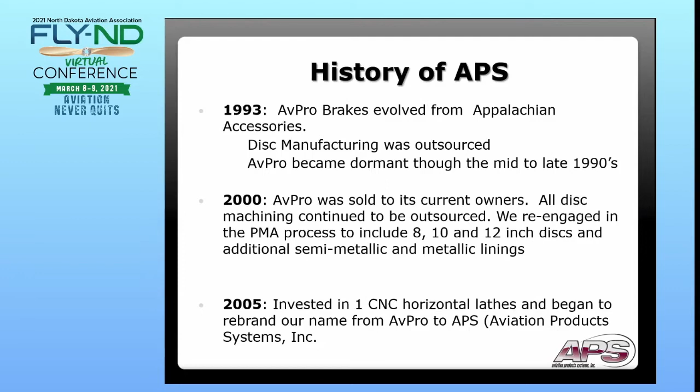So we expanded into the 8, 10, and 12 inch discs, and then added some more semi-metallic and metallic linings. About 2005, we invested in a machining company, and we brought all machining in-house, where we started with one CNC horizontal lathe. At that point, we changed the name from AvPro to APS, which stands for Aviation Products Systems.

In 2009, we added another lathe, and in '16 the same thing. Now I believe we have 5 horizontal lathes that are running 10 hours per day, 2 different shifts, 5 days a week.

With that, we have been able to cover all the aircraft that use this style of brakes, and the demand is growing out there with everything that's going on in the industry.

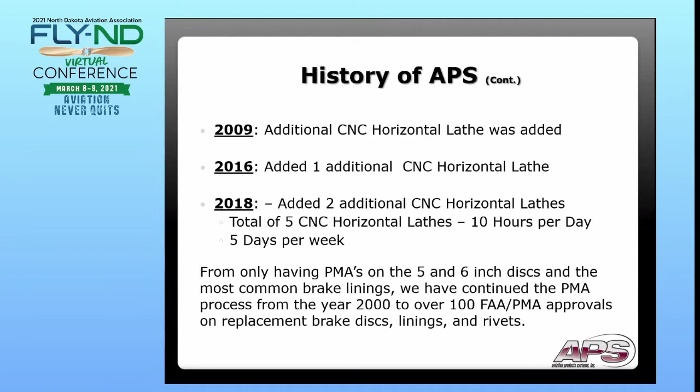With the PMA process, the parts manufacturer approval process, under Title 14 CFR Part 21 Subpart K, that's what lists all of our regulations that we must follow, and the procedures thereof to get the approval to do what we have to do to make our products.

The FAA spells out that the PMA part has to be an approved identical part, which is a direct replacement for that of the OEM, on the linings and the disc both. It must be equal to or better than that of the OEM. So Cleveland, the OEM in my case, is the baseline. I had to meet or beat that of Cleveland on a comparison test basis to be able to move forward with the products.

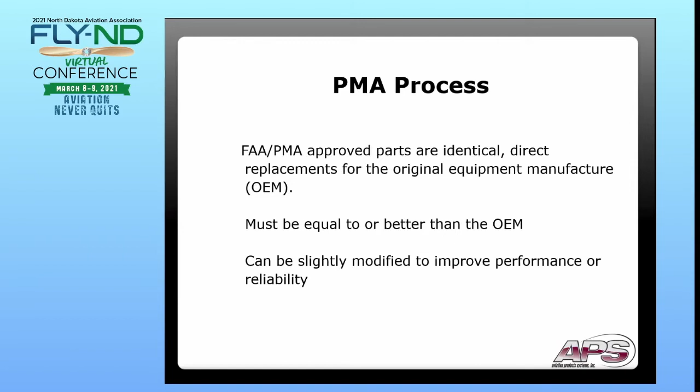That said, it can slightly be modified to improve the performance or reliability thereof. What we've done, as you can tell, is our brake discs are black. That black color is not a coating - it is an actual byproduct of the heat treatment we put our discs through, which we'll get into here in a little bit.

With the PMA process, when we started off after we purchased this company, the PMA process starts where you have to identify a part that you want to PMA. For this case, it was the 8, 10, and 12-inch disc.

So we had to reverse engineer each part of Cleveland's to be able to apply for the design approval on the drawings, the material specs, everything listed there, in a big packet to send off to the FAA to be able to proceed with the testing to show that our product was equal to or better than that of Cleveland.

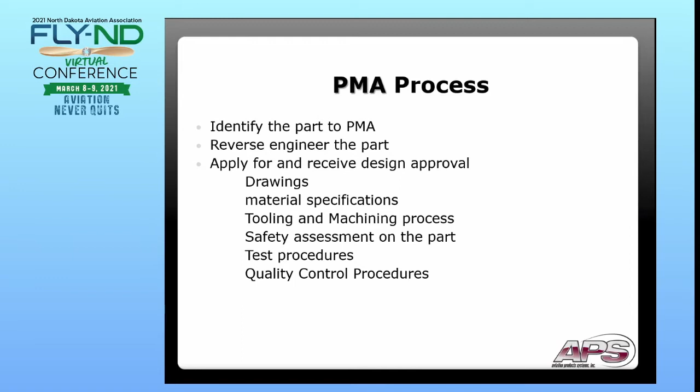At this point, we sent that packet off with all the drawings, all the part numbers, and all the measurements, everything. And what we had to do next was testing.

After we got approval on that packet we sent to the FAA, we had to test it. We had to test our product against Cleveland's product. And the test bed that we had to use was very, very extreme.

We took a Cheyenne 4 at 10,330 pound landing weight, 90 knot landing speed, no flaps, no reverse thrust, and we had to decelerate at a rate of 10 feet per second squared. As you can see, it created 1.7 million and some change foot-pounds of kinetic energy to stop that brake. This was all on a machine.

The 10 feet per second squared equates to that aircraft at that weight stopping in approximately 12 seconds and in 240 meters on average.

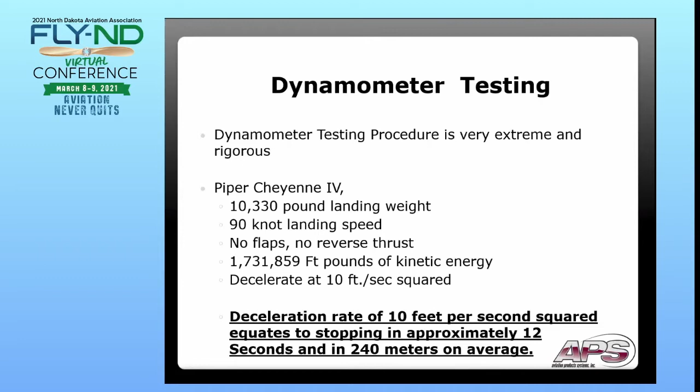So what it's doing now is accelerating to the 90 knot landing speed, no flaps, no reverse thrust, and it's programmed to decelerate at that 10 feet per second squared.

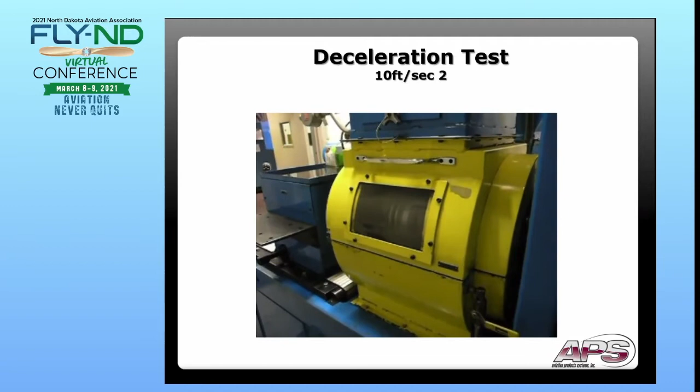So that was one stop. We had to do that to failure on Cleveland to get our baseline. Our baseline on that was 32 stops until Cleveland's part failed. Failure was separation of the friction part of the disc from the hat part of the disc.

These are both our linings and Cleveland's linings and disc. Theirs failed at 32 stops. What we did was we stopped at 34, where ours was still together. We could have done maybe 35, and could have failed on 35, but we stopped at 34 because we were equal to or better than that of Cleveland's.

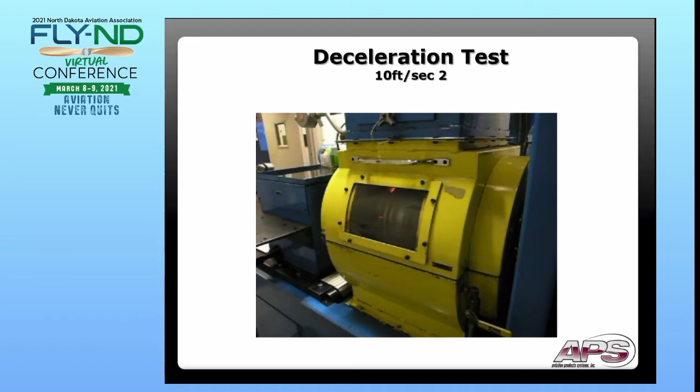At that point we have our first article. We know it works on a machine just fine. But we had to take that and put our lining in our disc after we were equal to or better than Cleveland's, and in this case it was better than.

Now, since it was a Cheyenne 4, that was the bigger 12-inch disc. Since we did not have the 8 and 10-inch disc on the PMA side, and since all of our submitted data for the drawing approvals was made to the same specific drawings, they grandfathered everything in below it, the 10 and 8-inch disc. So we did not have to do a flight test or a dyno test on every brake disc, just on that Cheyenne 4.

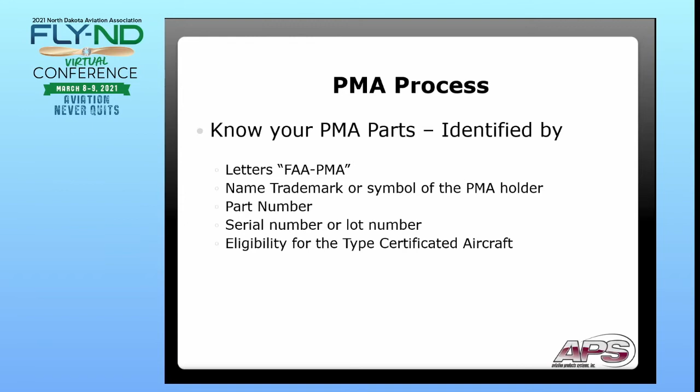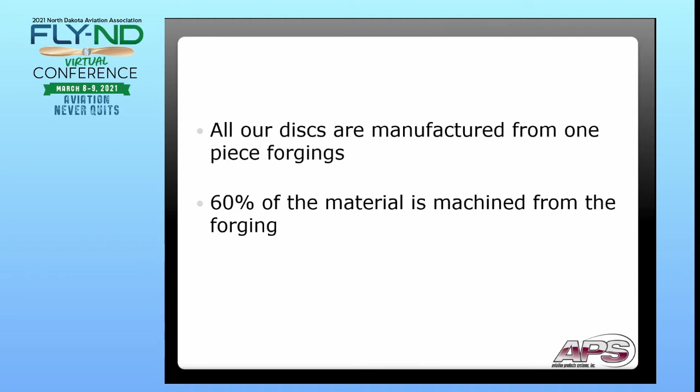Onto our brake disc - all of our discs are machined from a one-piece steel forging. We were the first company, from the 5-inch disc all the way up to the 12-inch disc, to introduce a one-piece steel forging brake disc. This makes a stronger brake disc for you. 60% of the material of the forging is machined from that piece. That's what they start off looking like.

We get these forgings in from the foundry just like this, and from there we organize, lot, and serialize each one to be able to use whenever we have an order pop up. So we've got two different warehouses.

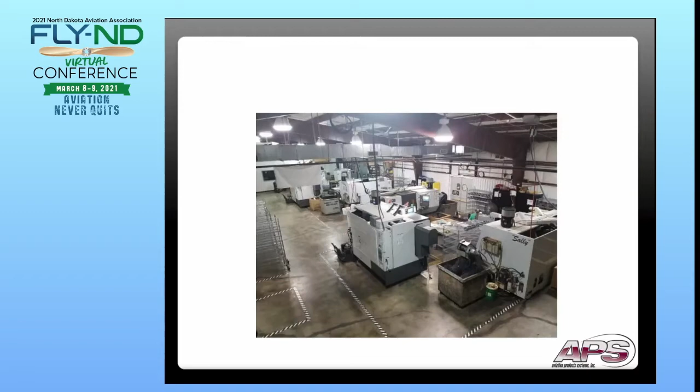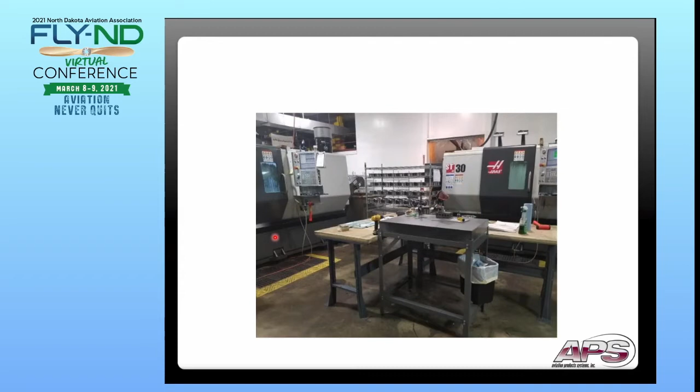This is our front warehouse showing all of our machines. These machines are really big, really heavy, really expensive, and very, very hard to use. We've got skilled technicians trained to use these to machine the brake disc - everything is done by computer. Right there is the machine where we program in to set up the jaws and cutting tools to make each particular part number brake disc.

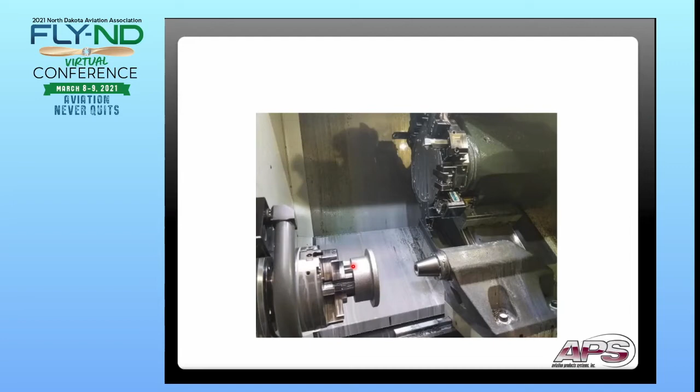So the life of a brake disc - say we're making 50 of this part number brake disc. We pull whichever lot we use and get them ready for the machining part. This is the inside of one of our lathes - here's where the forging is mounted, and the cutting tool there, that's a drilling tool, and that's a cutting tool to machine that material off of it.

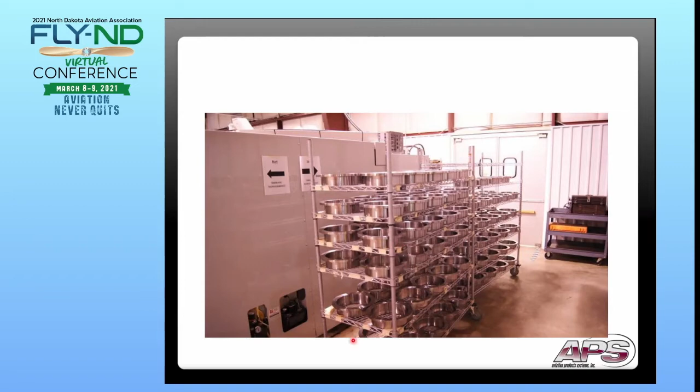After we machine all that material off, we're ready to go to our first QC for this particular part number of brake disc. If you notice, our brake discs are still silver - these are freshly machined, and we go into our CMM, where this machine measures 76 different critical points on that brake disc to make sure it falls within dimensions on the drawing.

From there we box them up after they all QC. We have to QC a certain percentage of the 50 brake discs we were making - in that case, it would be 5%. We QC a proper amount, and from there we send them off to be heat treated.

That heat treatment is our key - that's what makes our brake disc last longer and perform better than that of the OE and the other PMA. We send these brake discs off to be heat treated, which we'll talk a little bit more about in the coming slides, and then we get them back.

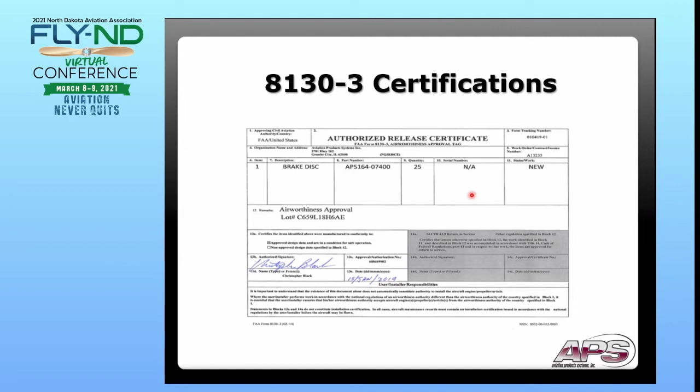When I said earlier we had to QC them the first time, we now have to QC it a second time, the same percentage of whatever lot we sent out, to show that we did not alter or change the design of that brake disc since we put in that added step of the heat treating process. So we QC that same 5 or 10% amount, depending on the lot size, and after they pass the QC, we show that it's all good. We put 8130s with all of our parts.

After we box them, after we do that second QC, we have a sticker on the outside of our boxes that says, stop, before installing, please remove the protective coating with MEK, alcohol, or acetone. I have gotten the call before, Ben, hey, I'm rubbing, I can't, I'm using MEK, I can't get that black color off of this disc. And yes, you'll be rubbing for quite some time for that black color to come off of that brake disc.

What that protective coating they're talking about is that there may be some leftover machining oil on those brake discs, as they're bagged up from the heat treating process. So that's what we're saying to wipe off with the MEK.

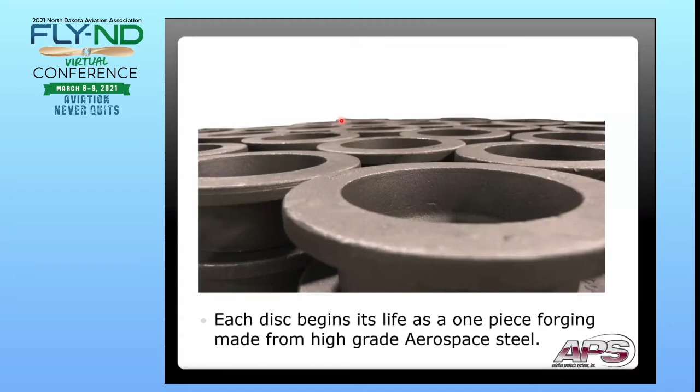First hand is the heat treating process we put our discs through. That's the final step in the machining process, the manufacturing process, where we introduce nitrogen and sodium in liquid form at a very high temperature to the surface of that disc.

What that does is, that black color, the black steel, is the byproduct of the heat treatment. So again, that black color is not going to come off. Now on the friction surface it may turn to more of a dull dark gray, but that heat treatment has penetrated through beyond wear dimension of that brake disc.

So what that does for you, it's not going to rust, pit, or corrode on you, and it gives you longer life. We have proven that when you use them together with our semi-metallic Kevlar base pads, as well as our copper flashed metallic pads with the copper flash backing plate, you will get longer life compared to the Rapco equivalent and the Cleveland equivalent.

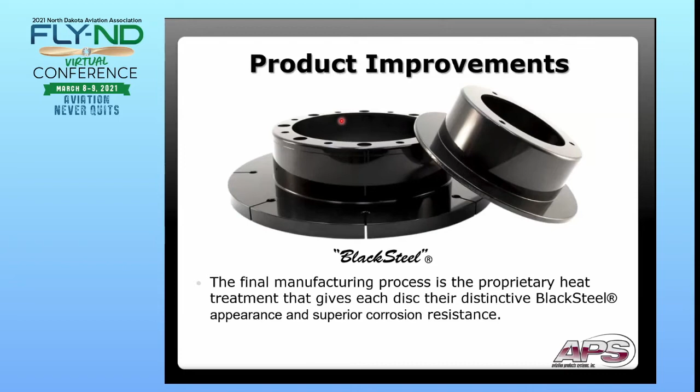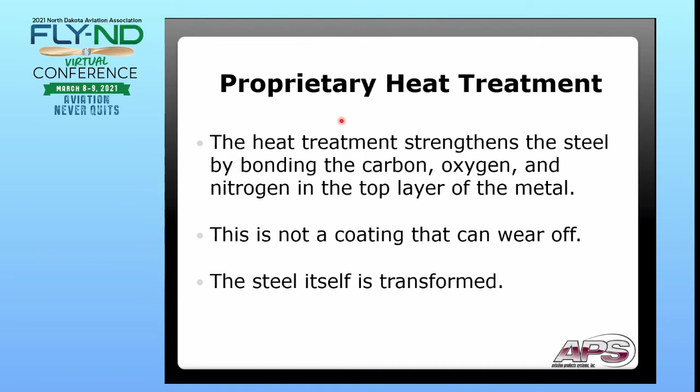That heat treatment is similar to what Lycoming does to the front end of their crankshafts, but they use nitrogen and ammonia, we're using nitrogen and sodium. This is making it a stronger steel, and that's what gives our brake disc the black steel appearance.

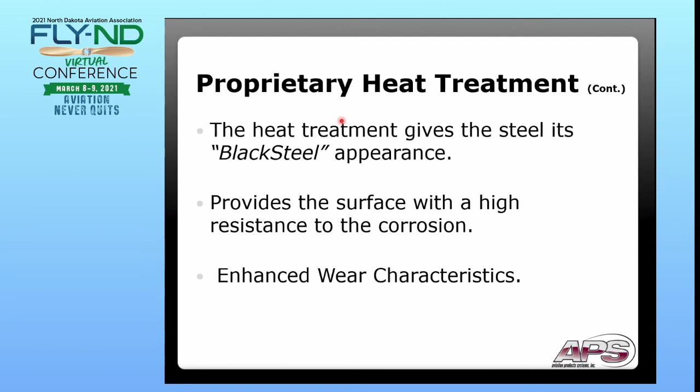Another product improvement we've gone through is our blended radius on the drilled disc. This would be like the Twin Commanders, and I believe the 802s have this too, but I say Twin Commanders because this is where we first found out about it. We were having problems, we heard in the field before it got to a problem state, that it was cracking. Before we started doing this blended radius, we were just drilling it straight down where there would be a 90 degree edge right there on that drill.

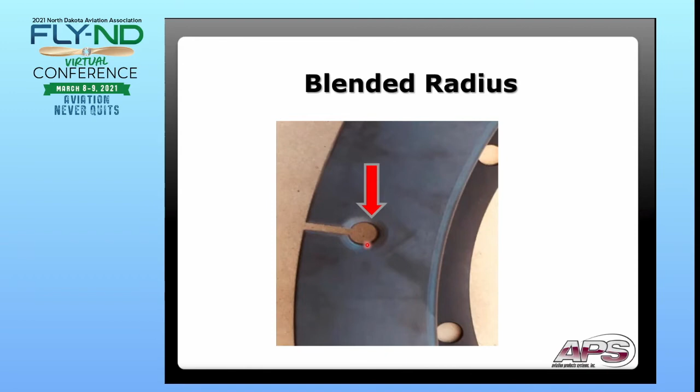So that was a cause, that was an attraction for high stresses, from there to there, and there were problems with it cracking from the hole to the inside part of the disc. That's when we went to the drawing board with our engineers and implemented this. We were the first to implement this blended radius, and we actually do it on both sides of the friction part of the disc, top and bottom, where the OE only does it on the bottom. That's just an improvement we wanted to make, and we were the first to catch it and address the problem, even though everybody was doing it.

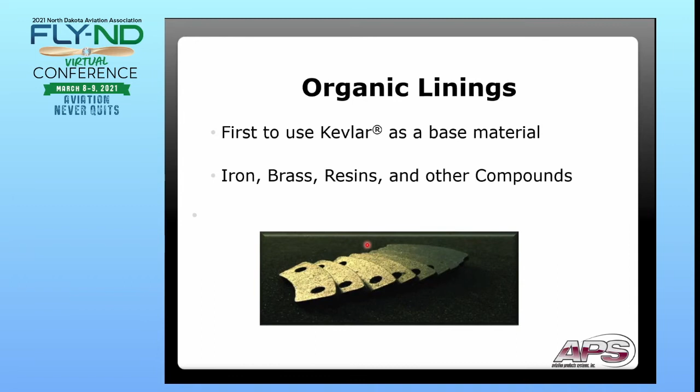For product improvement, our semi-metallic pads have Kevlar in them. Kevlar base material offers better heat transfer and longer life on your linings.

Same thing on the metallic side. Notice the two different colors on the backing plate, between the backing plate and the friction part of the lining. We actually copper flash the steel backing plate that the friction material is adhered to. That offers better heat transfer, it's a corrosion inhibitor, and gives longer life with the transfer material. Finally, it's a better bonding agent for that friction material to stick to the backing plate.

So these are going to be the linings for your heavier, faster landing aircraft.

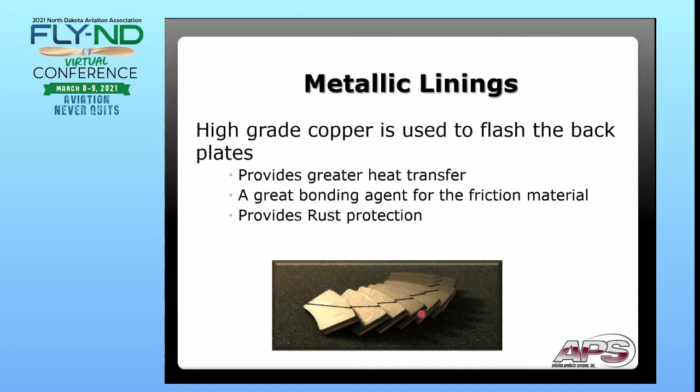Again, for product improvement, Cleveland came out with a product information bulletin, a new lining, the 66-15-300, which is for the Cessna 208. It's a lining that is 35% thicker than the original equipped lining for the Caravans.

What Cleveland did to use their linings on their brakes was convert the brakes from a 30-182 to a 30-182A. That conversion was just a data tag, and that data tag was about $700 to be able to convert your brake disc.

So what we did is, for the Caravan operators, we PMA'd our linings to the aircraft, not to the brake assembly. So whether it had a 30-182 or a 30-182A, you could use our linings for that, which is the extended life lining.

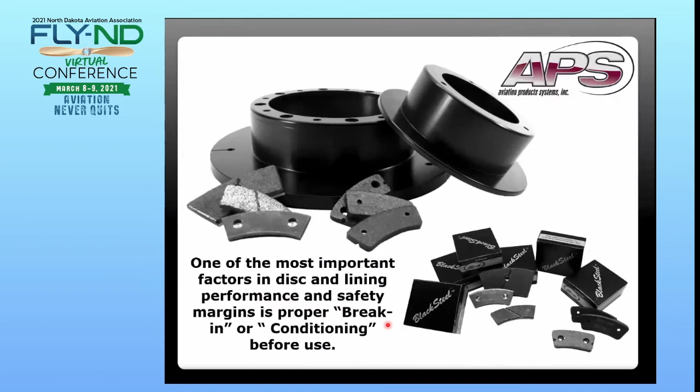The break-in theory of the disc and the pads. That's the most important thing you can do on a brake lining and disc change, is to break them in. This is so you can get the longest life of your linings and discs through properly conditioned items. Whatever you want to call it, breaking in, bedding in, burnishing, it's the same principle, just do it.

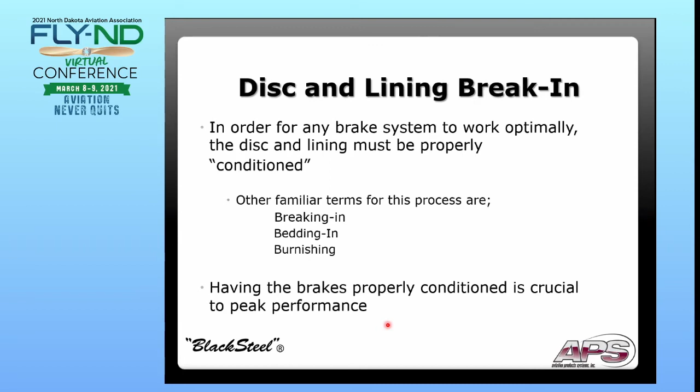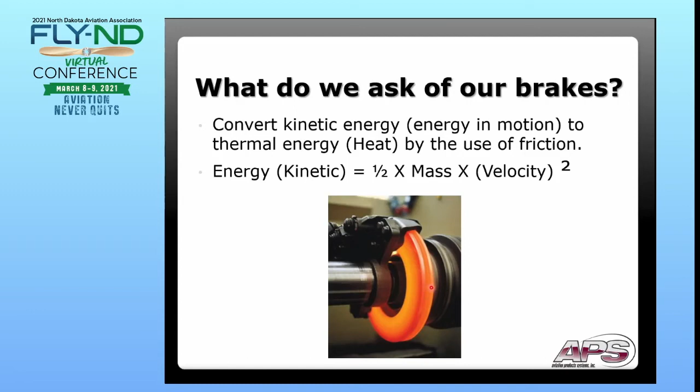But before we get on to the break-in procedure, what do we ask our brakes to do aside from stop? We're converting that kinetic energy, the energy in motion, to thermal energy by use of friction. The kinetic energy is one half times the mass times the velocity squared.

In the case of a 172 coming in on final approach at 60 knots at 2,400 pounds, that could create 159,000 foot-pounds of kinetic energy to stop that aircraft.

Now, that's not in any case what the aircraft is going to do, because we just have to prove that it can do that. That's not factoring in the flaps, that's not factoring in the drag of the aircraft, that's not factoring in the friction of the tires on the pavement after the aircraft lands. But the worst case scenario on paper, it can take that much to stop that aircraft.

But we have two different pads, the semi-metallic and the metallic. That semi-metallic pad is an abrasive type material. That abrasive type braking system is going to wear the linings out and wear the disc out, and until they meet their minimums, you remove and replace them. On the metallic side, that's more of an adherent type braking system, where you want to adhere the brake lining material to the surface of the disc to allow the linings to wear, not the disc.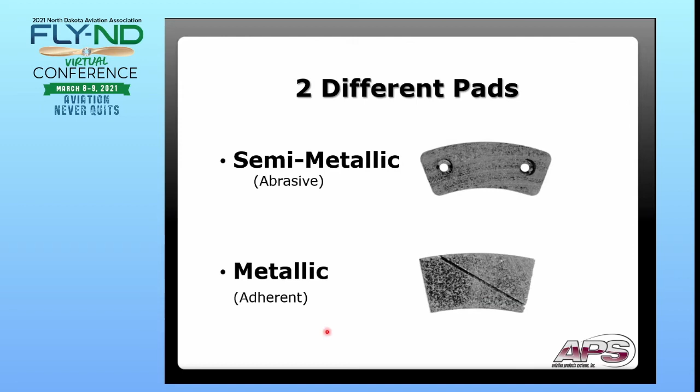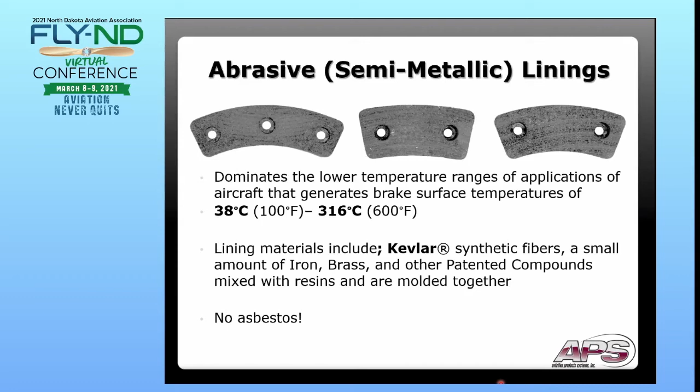So we'll start with the abrasive. On the abrasive side, the semi-metallic linings operate at a lower heat range, 100 to 600 degrees Fahrenheit. It's primarily a graphite material on the lining side, but it does have that Kevlar in it. This is going to be for your lighter, slower landing aircraft.

You're generating that friction on the linings, between the linings and the disc, to be able to stop the aircraft. The semi-metallic brake linings are riveted onto the pressure and backing plates accordingly to be able to be installed on the aircraft.

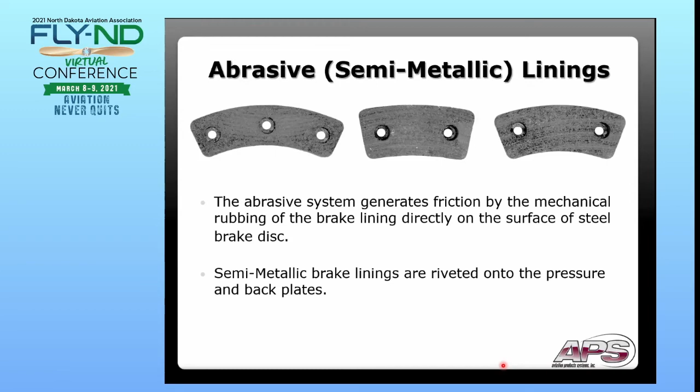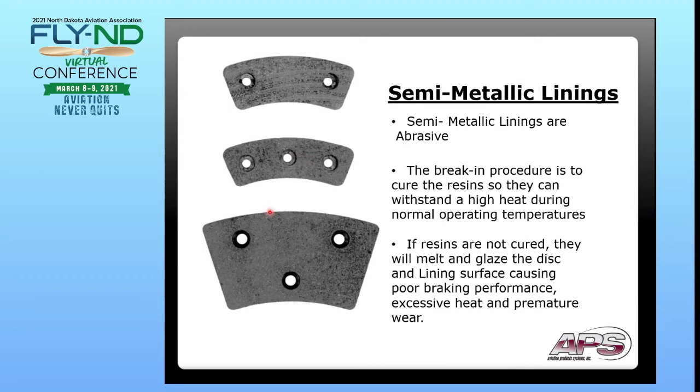The semi-metallic linings, again, are abrasive. The break-in procedure is used to cure the resins within that lining upon installation. You just don't want them to glaze over or get too hot on the first application of the brakes, because that could cause cracking or glazing on the surface of the lining, prematurely wearing your linings. The cracking would be out of the rivet holes if they were to get too hot on that first application.

But how do we break them in? Okay, so what we're going to do is break these in. These are the linings for like your 172. You're going to taxi the aircraft for 1,500 feet at 1,700 RPM, applying the brake pedal force as necessary to maintain a 5 to 10 mile an hour speed, a brisk walk, and then gently tapping your brakes. All you're doing is curing those resins within those linings.

Okay, allow the brakes to cool 10 to 15 minutes. Come out, you're going to do a static run up. During that static run up, as you increase the power with the brake pedals pressed, if you don't creep forward, the linings and the disc are broken in. But if you creep forward, you're going to repeat that first step. These break in very easily. The key point on this break-in procedure is just don't get them too hot, because you don't want them to glaze over.

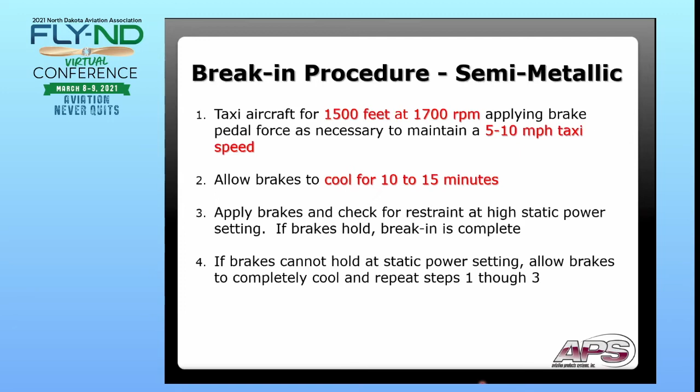But it's a different type of braking system on the metallic linings. That's the adherent system, so that's going to be operating at that higher heat range of 600 to 1,200 degrees Fahrenheit, because the friction material on this is primarily iron on the surface of that pad. So it's going to be operating at that higher 600 to 1,200 degree Fahrenheit range.

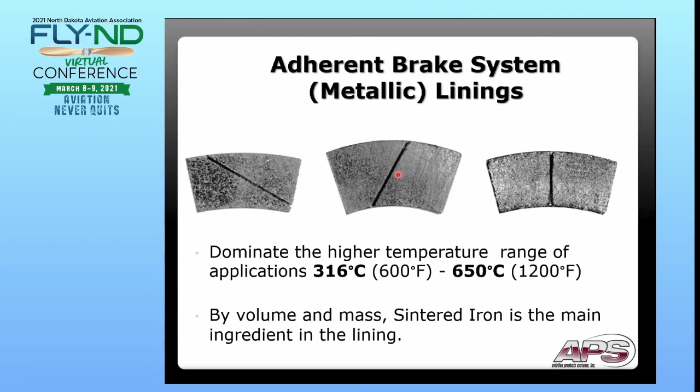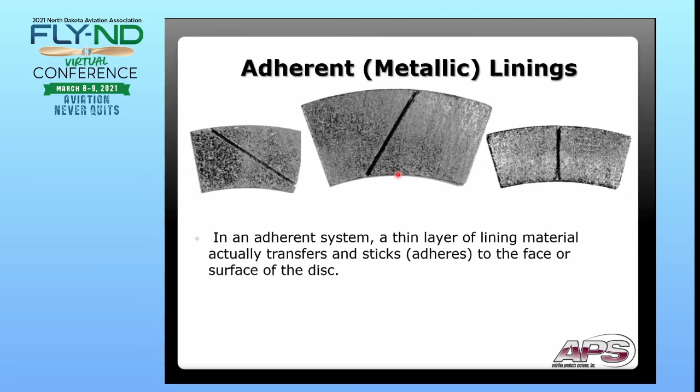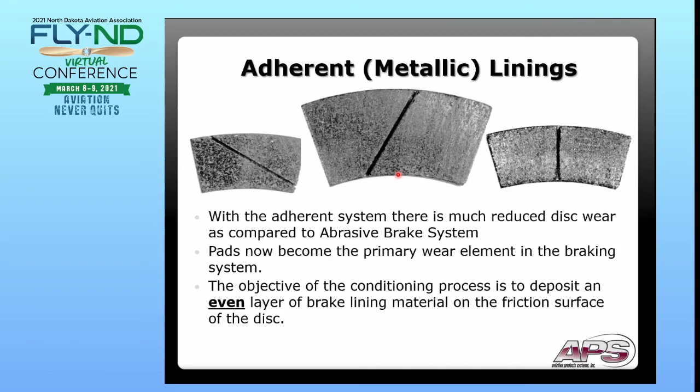On the adherent system, you're going to want to adhere a layer of lining material from the surface of the lining to the surface of the disc. What this is going to do is allow the smooth operation of your brake linings and brake disc, so that you wear the linings out and not the disc. You want that layer of lining material to be surfaced all the way across the friction part of the disc, so that layer has to be even. So how do we do this though?

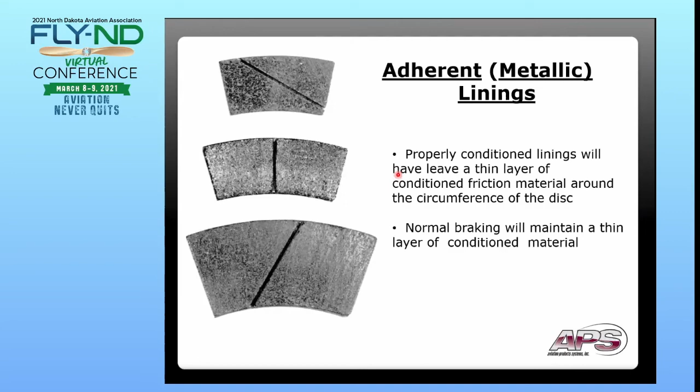What we do is taxi that aircraft to 30 to 35 knots. After you change the linings out, after you change the disc out, or after you change both the linings and the disc out, in any of those variations, you need to break them in. So taxi the aircraft at a high rate of speed to 30 to 35 knots. You're going to apply the brakes slightly heavier than normal pressure, coming to a complete stop twice. What you're doing is generating a lot of heat to transfer that layer of lining material from the lining to the surface of that disc.

And again, you're going to do it a second time. Do not let the brakes cool between stop 1 and stop 2. But after you do stop 2, allow the brakes to cool 10 to 15 minutes. Don't set the parking brake. Come back and then do a static run up. As you increase the throttle with the brakes compressed, if you don't creep forward, they're broken in. But if you creep forward, that means you did not transfer a layer of lining material from the lining to the disc on part of that stop, and you need to repeat that step again.

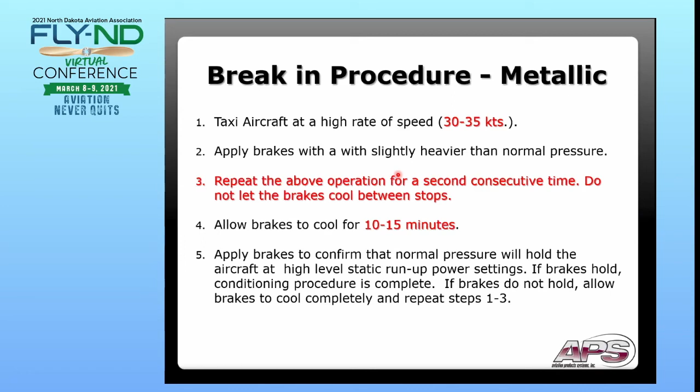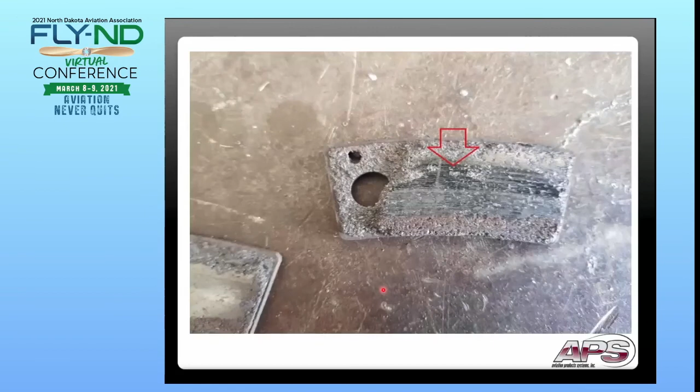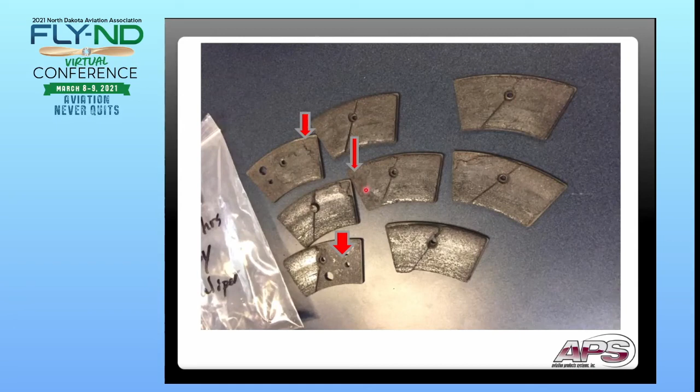The mechanic called me up and was complaining that the aircraft had spongy brakes upon application. So this is just showing here the material being glazed over. Here's another one, this is off of a King Air, showing the material there. This was all due in part because of the glazing and then the heat, because once it glazes over, you're relying on the pedals of the aircraft to stop that aircraft, because when the lining is glazed over like it is right here, it's just spinning on that brake disc.

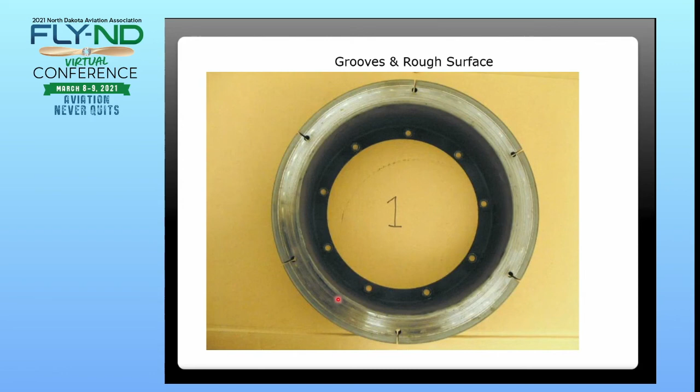So from there, the symptoms of poor break-in: you're going to have poor stopping performance, failure to hold during the static run up, and vibration or judder within the pedal. That's going to be from the glazed part rubbing up against the part of the brake disc that does not have the material transferred. On the semi-metallic side, you're going to have cracks or fissures in the brake pad material, which is all going to cause accelerated wear of the linings and the disc.

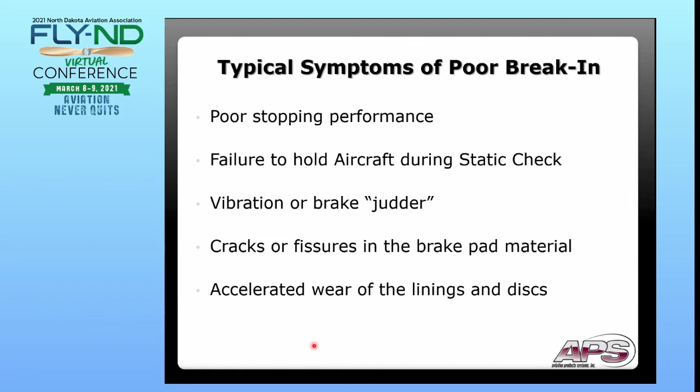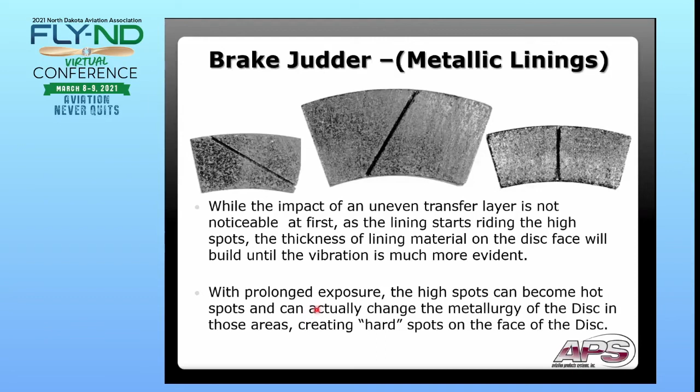On the metallic side, you're going to get an uneven layer of transfer. That material being transferred is what's crucial. It's what needs to be done for your linings to last as long as they should.

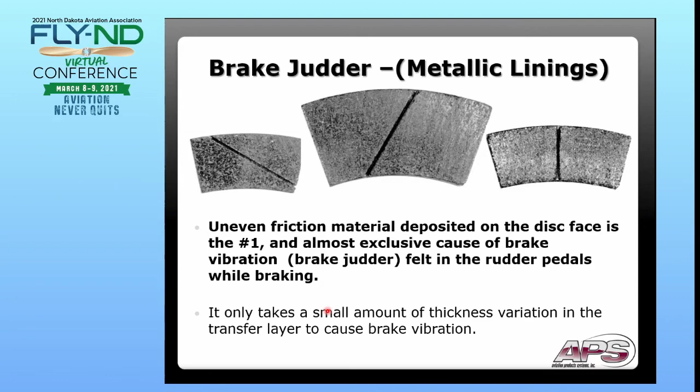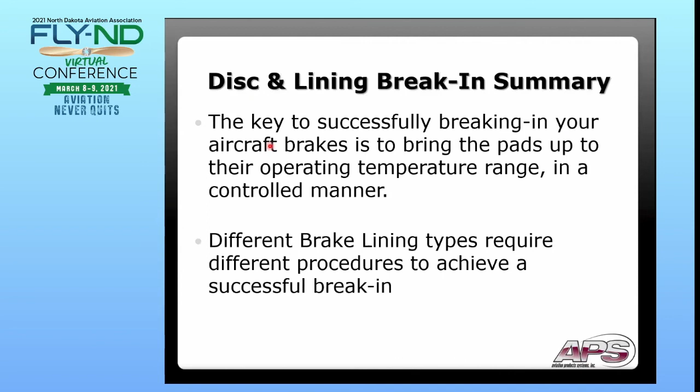So for your brakes to operate as they should and to get the life that you should, the break-in is crucial. Now, the basic maintenance awareness for my brake linings and brake disc, since we are a direct replacement for the OEM, all of our measurements are going to be the same, linings and disc, as Cleveland's, because that black color again on the brake disc is not a coating.

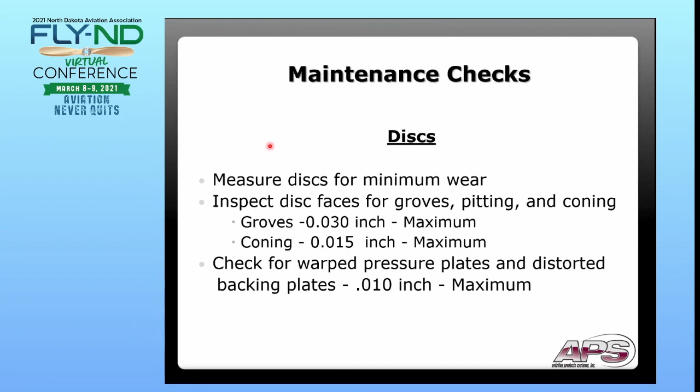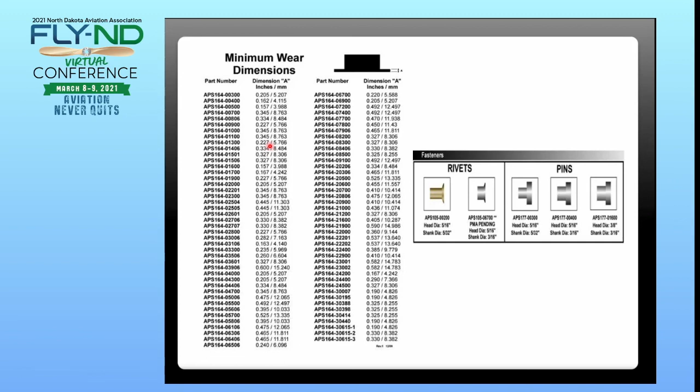So that doesn't add thickness to the disc. It just helps penetrate, making that brake disc a stronger brake disc. All the minimum wear specs on the brake disc are the same as Cleveland. So you can use that little green book I'm sure everybody has in the bottom of their toolbox for reference. But all the measurements are going to be the same.

On the semi-metallic side, the big thing I can say is don't over tighten your rivets. I actually got off the phone with a guy, I think it was Thursday, about an 802, an air tractor 802. He went down, and the lining cracked in half because he put too much pressure on the rivet tool, compressing that rivet. So just be careful when tightening those rivets not to over tighten them.

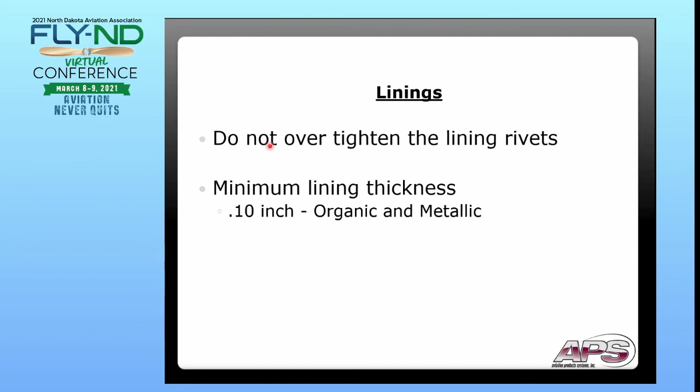And then the minimum thickness for the linings is going to be the same as Cleveland's, at a tenth of an inch. Just some basic what-ifs, warped pressure plates that could cause binding of the wheel and tire rotation. But it's all just basic stuff that they put in here.

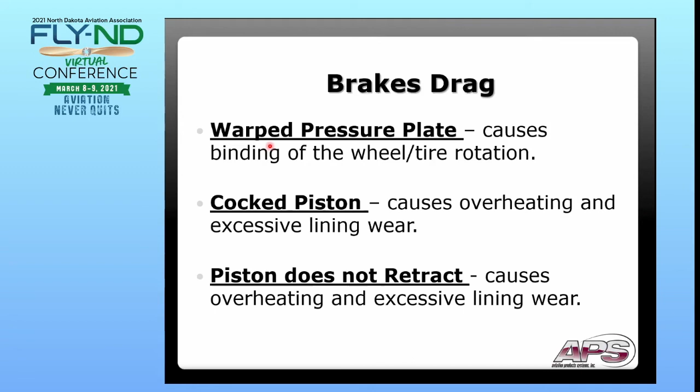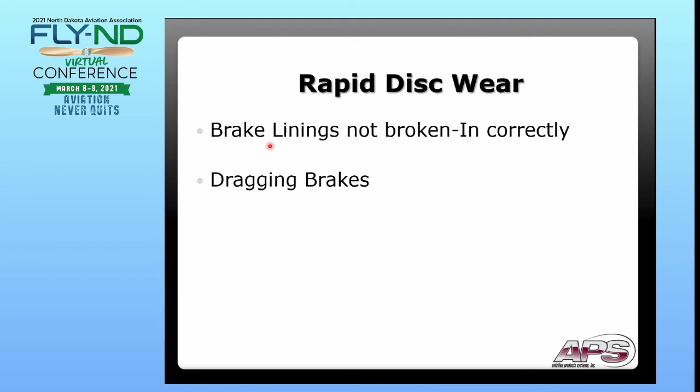But with the brake linings not being broken in properly, they are going to wear faster than if they are broken in. So that's what I want to be known, that I want your linings and your disc to last as long as they can. No need in prematurely changing your linings or your disc.

As far as the other PMAs that we have, we just received, almost going on about a year now, the kit for the PC12, the brake overhaul kit. So we're getting into the multi-disc brakes. We've got a couple more coming in the near future if we can ever get our approval from Chicago.

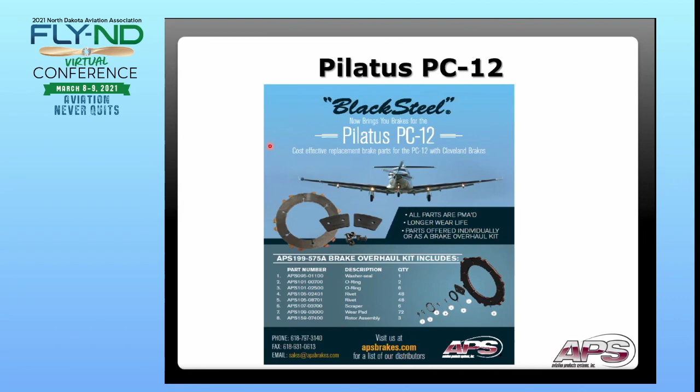With this whole virus thing, it's put a damper on everything, just like it has with everybody else. But the PC12, with more to come. This is just showing everything in the kit. These are the multi-disc brakes that have to be overhauled by a repair station or overhaul shop.

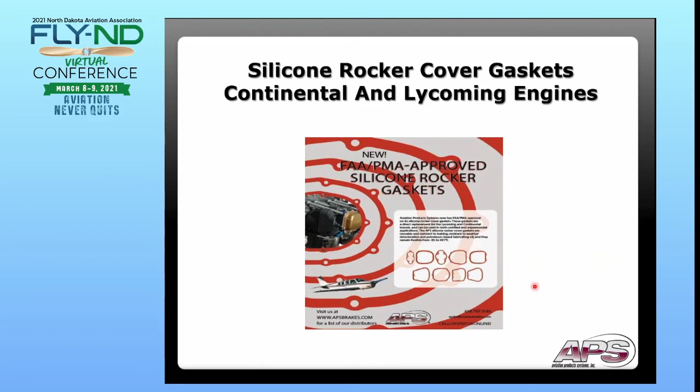We hold the approval for the Continental and Lycoming silicone valve cover gaskets, similar to what Superior and the old ECI, which I guess is now Continental, do, though there are a couple other vendors out there. But we hold the approval and eligibility for everything on those, Continental and Lycoming. Also the Lycoming drain back lines, which get bent real easy, we hold that too, to compete with the Lycoming and Superior equivalents and help lower the cost on everything.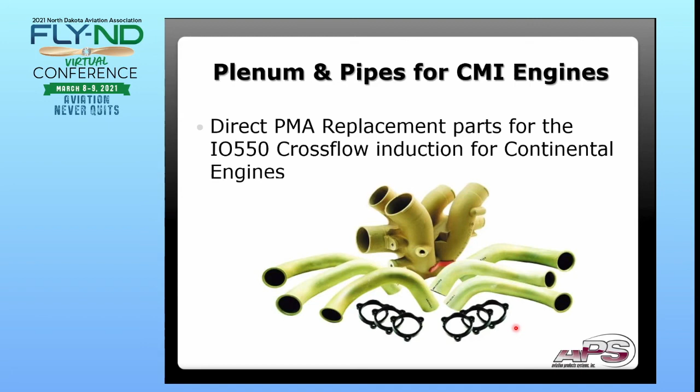For the Cirrus SR22, we do the plenum and the cross flow induction for the 550N that's on the SR22s, which is really just us and Continental. So a very big price difference, and it's all PMA'd. Everything can be found on our website, where to buy them, who to buy them from, the FAA paperwork, everything, the eligibility, at apsbrakes.com.

But that's really all I have for y'all, and I appreciate you sitting through this. If there's any questions, I guess now's the time.

We do not have any questions at this time.